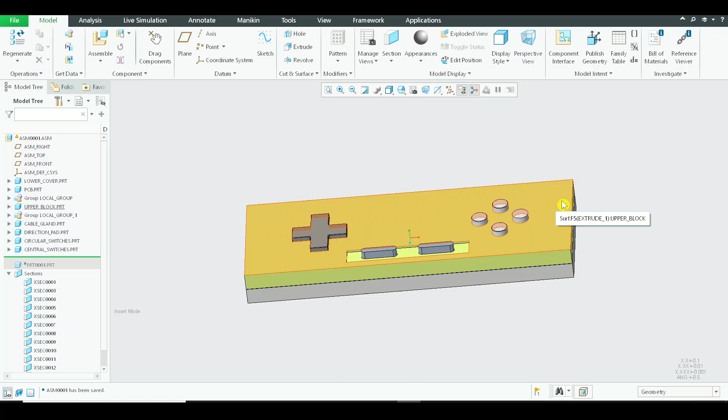In this lecture video, we will be working on the enhancement of the outer appearance of the upper part of this joystick. We have almost reached a finished state and incorporated all the minimal necessary components. If we look at the outer profile of this object, it is a simple rectangular block.

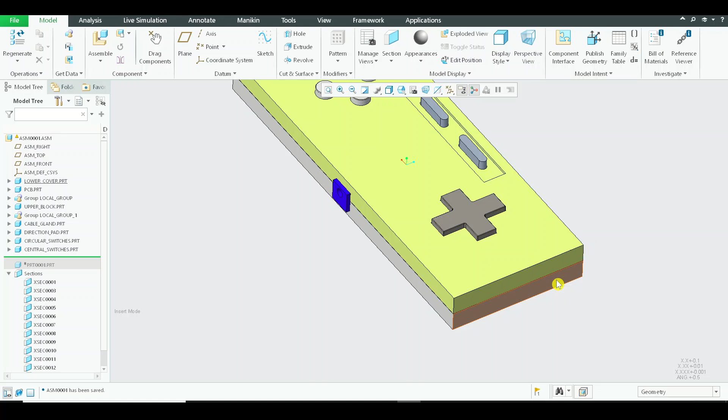Right now we have to add a few fillets or rounds to the sharp edges, which should be removed. Apart from that, I think the upper cover, especially where the consumer is holding or viewing the object, must have some more finishing touches that can enhance the representation of the part. So what we can do is add a kind of border for this.

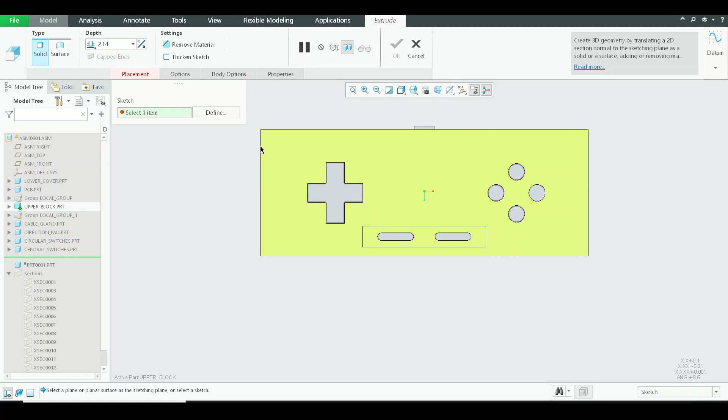I'll activate the upper cover, go to extrude, and select the top surface. Now I'll click on project and select the outer edges of the upper cover, ensuring I'm not selecting any background references. Please check whether there exist any other parts belonging to the assembly.

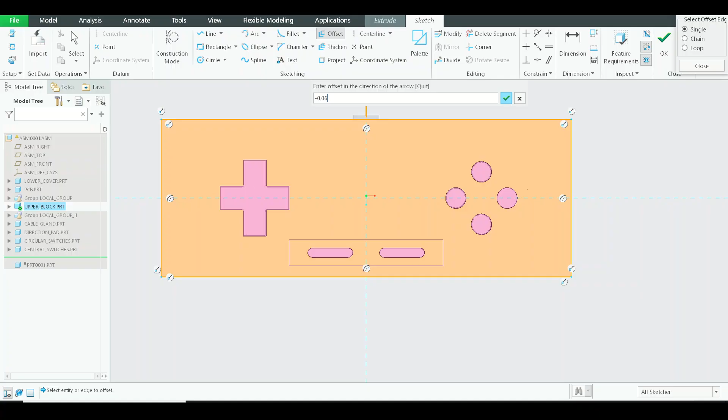Now I'll click on offset again. I'll select the outer edge and type -0.06 or 0.06 from all the sides, and the most right side. Let us make this a closed loop, so we will be deleting unwanted segments.

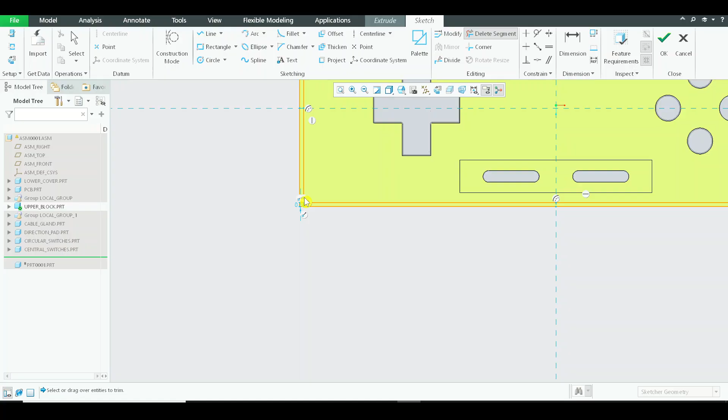Alright, so this has been created. We can press OK right now, and let us add a thickness of 0.030. This acts as a surrounding border to the complete object.

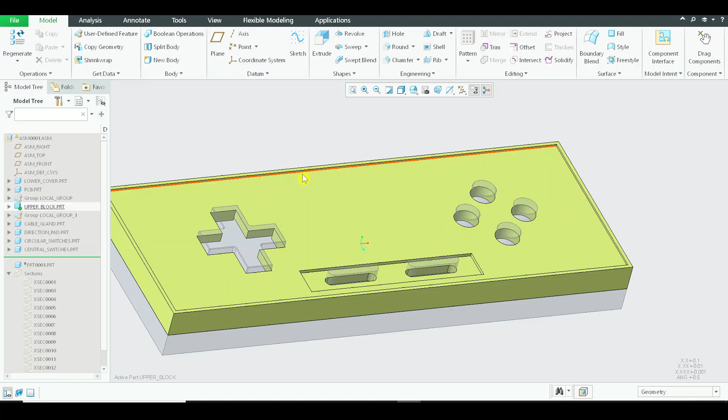In addition to that, we can add borders for these cutouts as well. So we will hop to the other window, click on the surface, make it a normal view, click extrude, and quickly add borders for these slots.

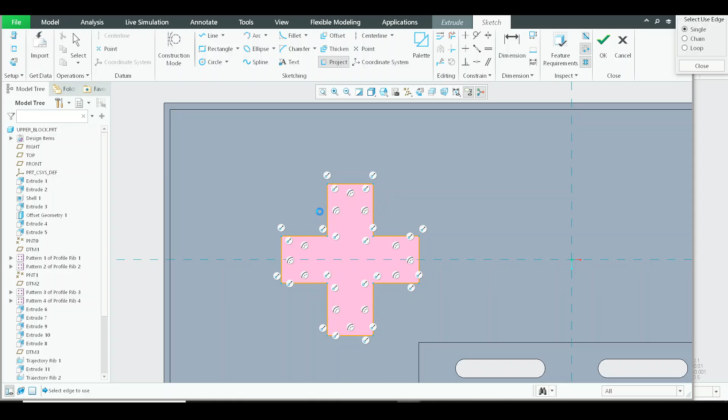So all these are nothing but appearance aspects. I'm sorry, I'm projecting again, I have to offset it. We will maintain a uniform offset for all the edges in this model, that is 0.060.

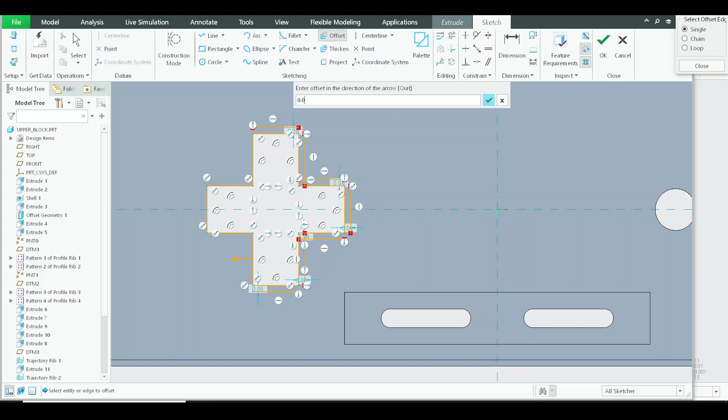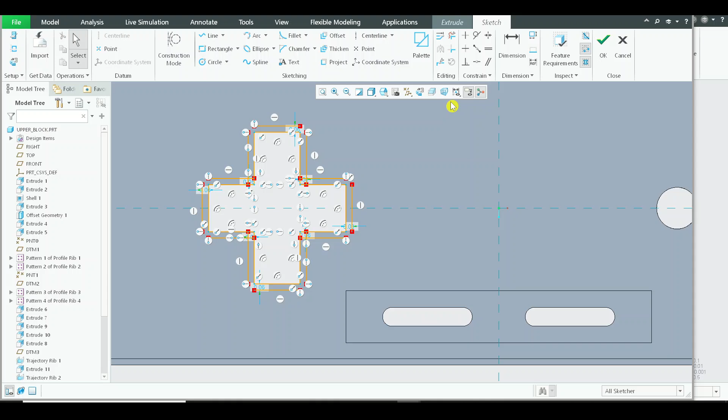Now if you're looking at the figure, it's looking pretty clumsy because there exist the symbols of constraints and entities. So if you want, we can hide them. We can just go to this icon and turn off the constraint displays. This will simplify the representation and make it easier to view all the segments.

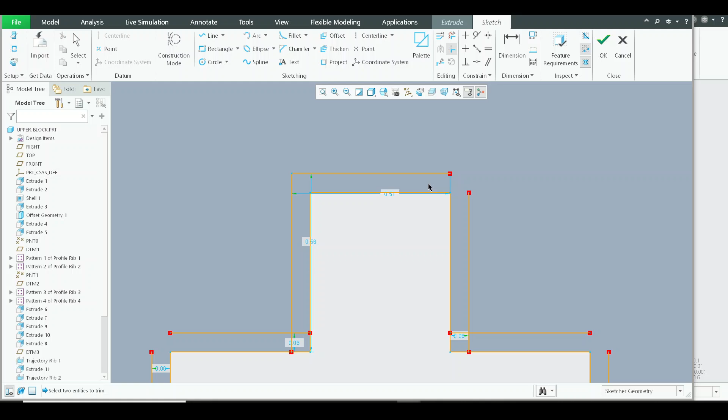Now we can just go to corner—where is the corner option? Where is it, yeah, this one. Sometimes we forget the options in their simple forms.

This is one of the best options. It will join the entities and close them together at a certain point, and also automatically delete unwanted segments. It deletes and adds, so this is the multi-purpose tool which we have.

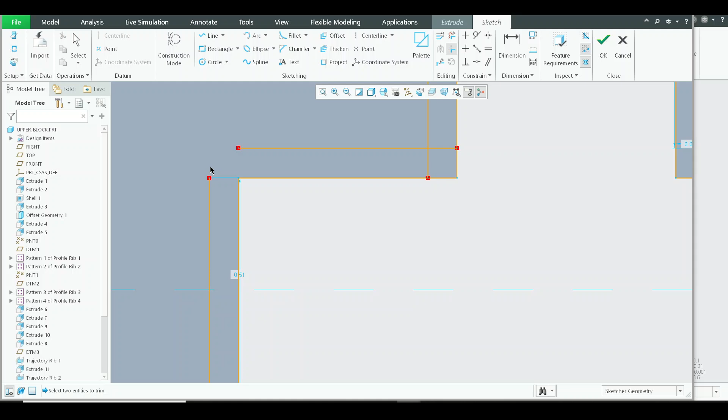In this case, I'm adding an entity over here, and in this case I'm deleting these two entities. Now I'll just press middle click. Technically it has to be a closed loop. I believe there exist some multiple lines or something.

Let us just try to see whether it is forming. Yeah, it is forming up. And let us extend the extrusion for a certain distance.

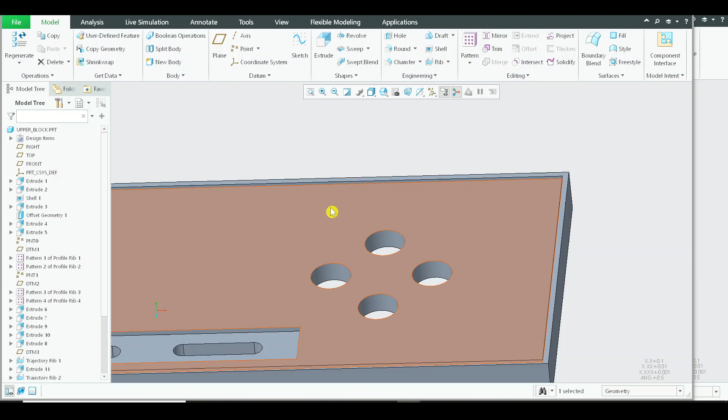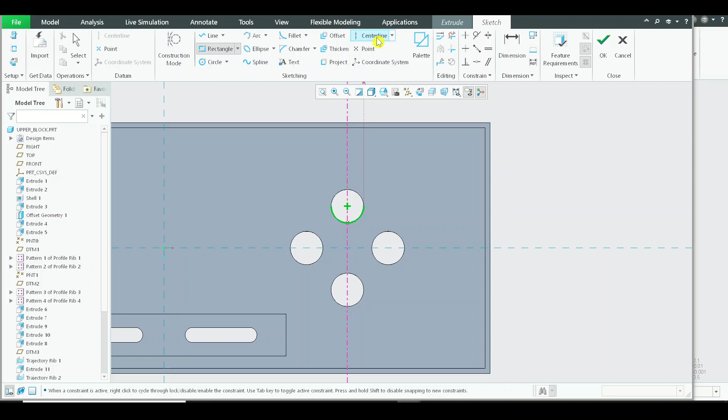Now we'll bring it to the normal view for this part or region, and click on extrude again. For this, what do you call these switches over here, I will be making a rectangle, and we will be adding material to it.

All right, so this is 1.8 by 1.5. Let us just try to maintain symmetry for this edge. It's already symmetric. Now we can just select this because we don't want the holes to be covered.

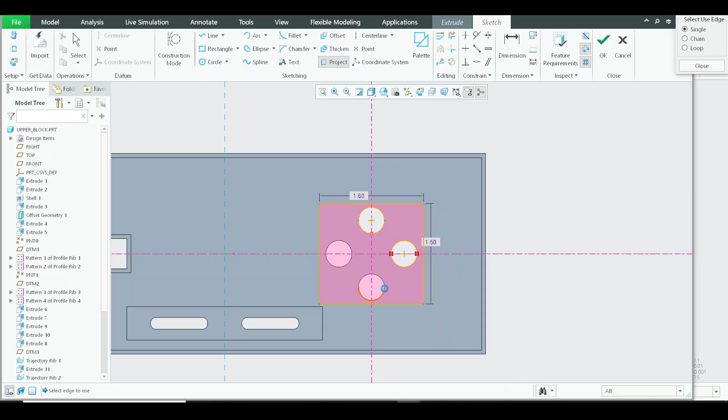So I'm just creating these segments over here so that the rest of the object will be extruded at a distance of 0.030. All right, and what else can we do?

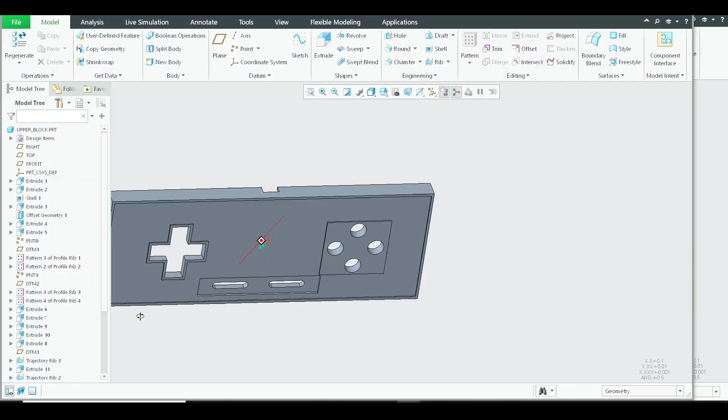Yeah, I think this is fine. This looks fine to me. If you want, you can circle these loops and extend them with some extrusions, or else you can just make a cut over here in order to make it look different. I'll just try to do that.

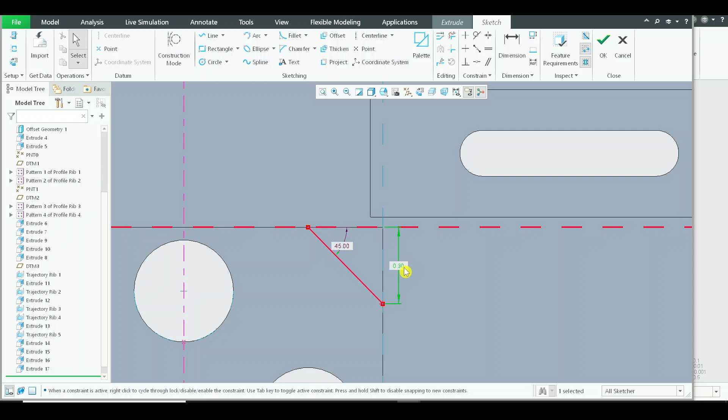Firstly, I'm taking a center line and drawing a line over here with a 45-degree angle, maintaining a uniform distance on both sides. I'll draw a line over here, 1, 2, and 3. I'll select this and mirror it on the left side.

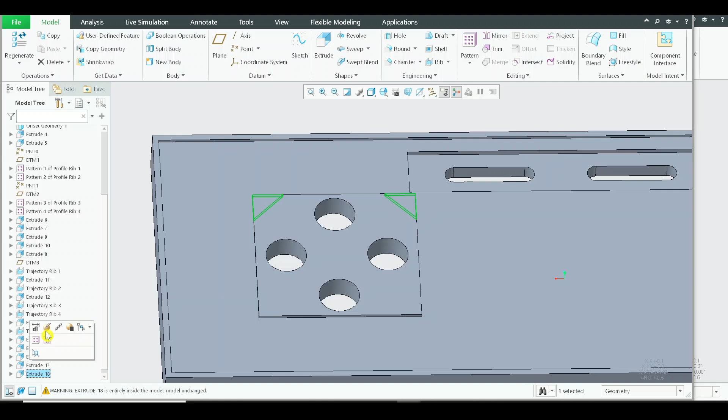We will change the direction, but we do not want the material to be removed—we want it to be placed up to the surface. Sorry, we have to remove the material, but up to the surface, so we get this kind of shape over here. This is how the user will be holding the joystick.

Now in the next video we will be adding the drafts to the complete cover. As I've mentioned, the draft is a very important aspect whenever we are planning to manufacture.

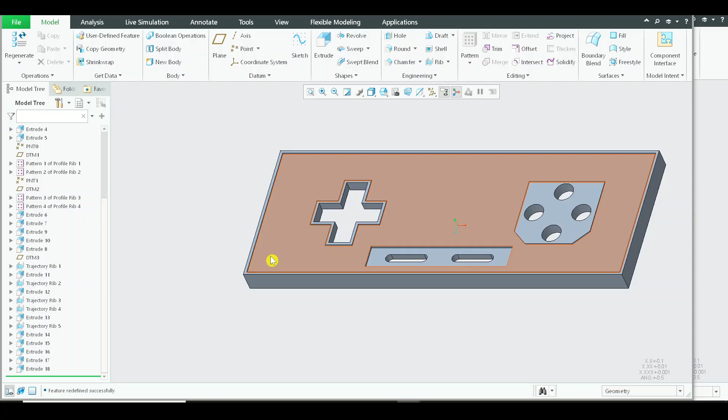Now you can see the model tree, how we have started and where we have ended, and this is a mere example of a simple part. Now you can imagine that if we have more complicated parts to manufacture, these are developed in this way one by one. We have to add the features, understand the requirement, place them at the desired position, then check again in the assembly whether they are interfering or causing any interferences. I believe you are understanding, and now let us move to the next video and add up drafts.